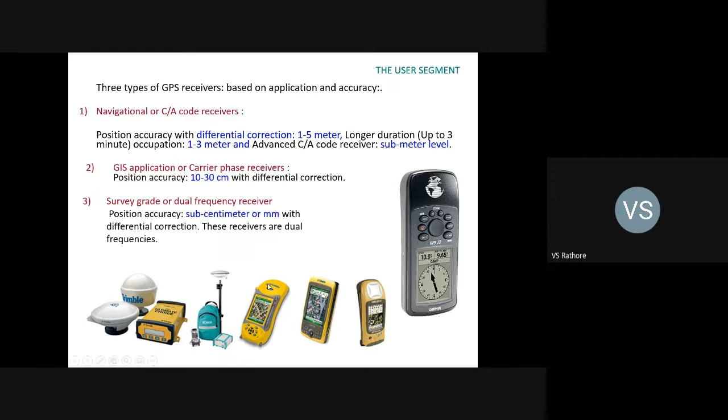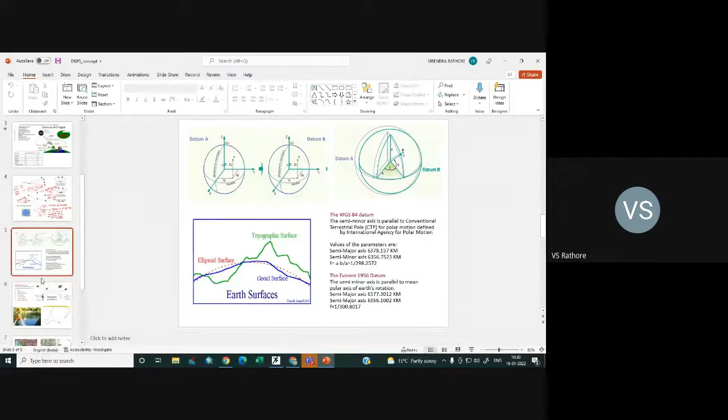Transformation of coordinates is to be done when you have one piece of information in WGS84 and another in Everest 1956, as found in topographic sheets. Now you want to analyze both together, so you have to either transform WGS84 coordinates into Everest 1956, or Everest 1956 into WGS84. Then you start analyzing, because all the information will be in one coordinate system and geometrically correct.

So in coordinate transformation, two methods are commonly used. What are these two methods? One is the Molodensky transformation.

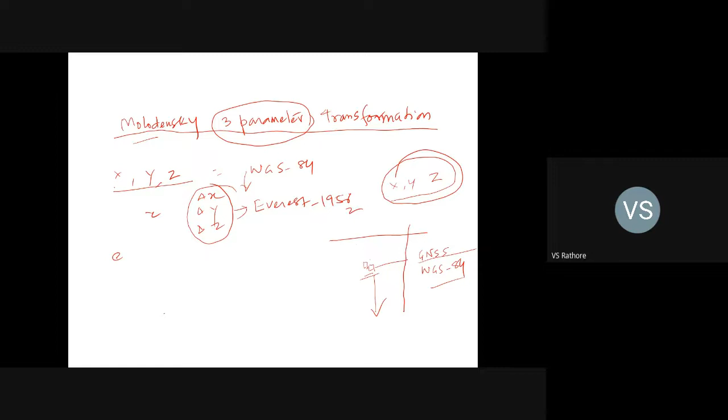X is obtained by Rn plus H, into cos phi into cos lambda. I will be explaining you this also. Then Y, these are Cartesian coordinates, x is Cartesian, y is Cartesian.

The formula is Rn, where Rn is radius of curvature, h is height above the ellipsoid, and we use cos phi and sine lambda. For X both are cos, for Y it is cos and sine lambda. Cos phi means latitude, phi is latitude, and lambda is longitude.

Longitude is the angle of longitude, and phi is latitude. So whatever angle you have, you put it in and find the cos, then calculate the Rn, and h may be given.

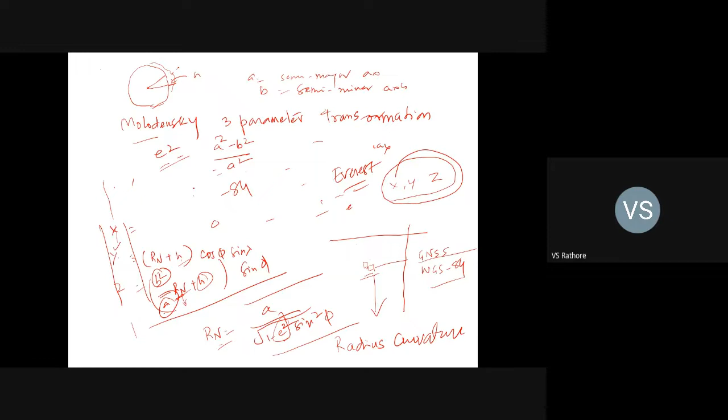You will get the x coordinate, y coordinate, and then del x, del y, del z. You have to obtain del y, del z, del x, del z - how do you get that? So in this 3-parameter transformation, you need to know the del x, del y, and del z.

So in getting those, you only have to identify some common points which are in the field - it may be a road crossing, a railway or road crossing, a railway line, or a river. So take the 4 points which are bounding your area. This is a common point, this is a common point, this is a common point, this is a common point.

So here you find out the value in WGS84 and also in Everest. So for any feature bounded by these 4 coordinates, you find out the displacement difference between WGS84 and Everest 1956, and it can be applied to all the points here. So coordinates of the feature which are in this bounded area can be transformed.

That is the procedure in coordinate transformation. Is it okay? Now what is the equation of 7-parameter transformation? I will be telling you that, then moving to another slide.

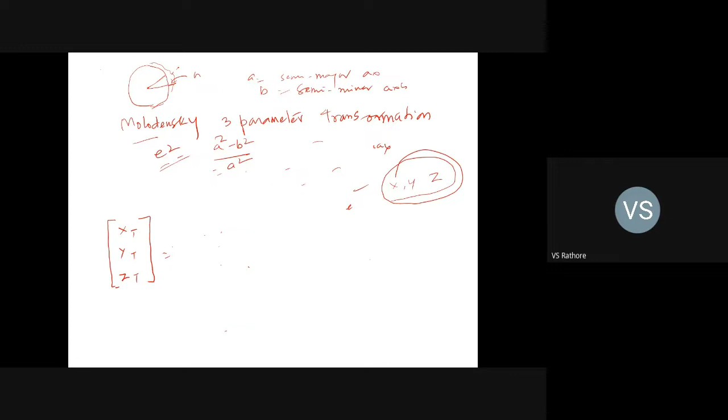7-parameter transformation: x, y, z target. We want to get x, y, z in Everest or in WGS84. So as I was telling you, in case of 7-parameter transformation, the Helmert 7-parameter transformation, 3 parameters of shifting, 3 parameters of rotation, and 1 parameter of scale are considered. Whereas in case of Molodensky, only 3 parameters of shift are taken into account. So that is the difference between the two transformations, Molodensky and Helmert.

In the Helmert transformation, the scale is multiplied first, or you can say scale is multiplied with the rotation parameters. Rotation parameters are: rotation along the z-axis, rotation along the y-axis, rotation along the x-axis.

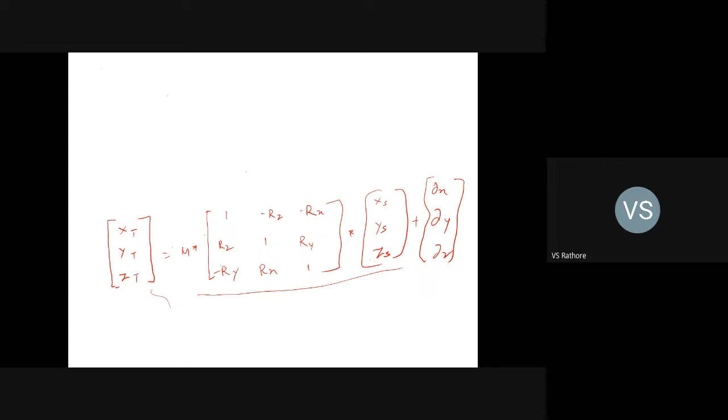Then I'll be coming to the differential GPS. See, differential GPS - D stands for differential correction, differential GPS, right? So in case of differential GPS, there are methods: static method, rapid static, reoccupation, stop and go, true kinematic, real-time static, and real-time kinematic. These are the differential surveying methods.

Now you understand the concept of differential corrections, right? Many people confuse what is differential - they don't understand, but I'll try to explain it in such a way that after this lecture, you will carry the concept very clearly, with the correct answer.

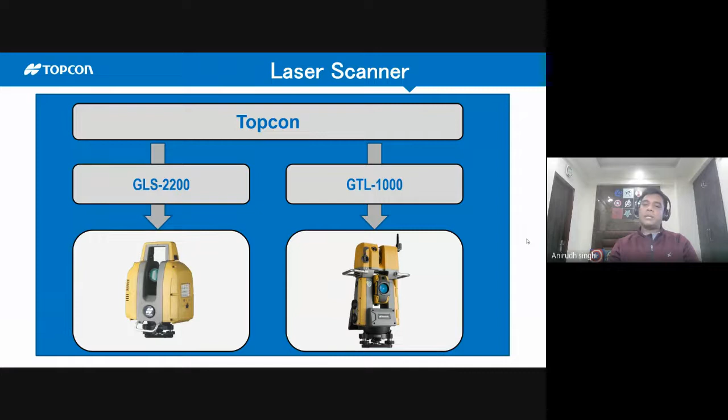As far as laser scanners are concerned, Topcon produces two products. One is GLS 2200, which is a terrestrial laser scanner. The second one is GTL 1000. I'll talk about this special instrument at a later stage because it's not just an instrument, it's a solution. On the lower side, you can see a robotic total station, and on the upper side, you can see a laser scanner - two instruments combined into a single instrument.

Now this is the GLS 2200 laser scanner. It's a terrestrial laser scanner which is tripod mounted, which has a full dome field of view.

This instrument consists of a 3.5 inch onboard touch screen. It has dual built-in 5 megapixel digital cameras, one wide angle camera, and if you want more detailed information of your feature, you have to go with a tele-angle camera. As far as data registration methods are concerned, you have backsight to prism method, and you can use the resection method also, so your data comes registered from the ground itself. It has automatic height measurements.

Now this is the GTL 1000, a snapshot of it. Earlier, for layout information you required a total station, and to capture as-built information in the field you were taking a laser scanner. So Topcon introduced a combination of both, where you can do a layout and capture as-built in the field.

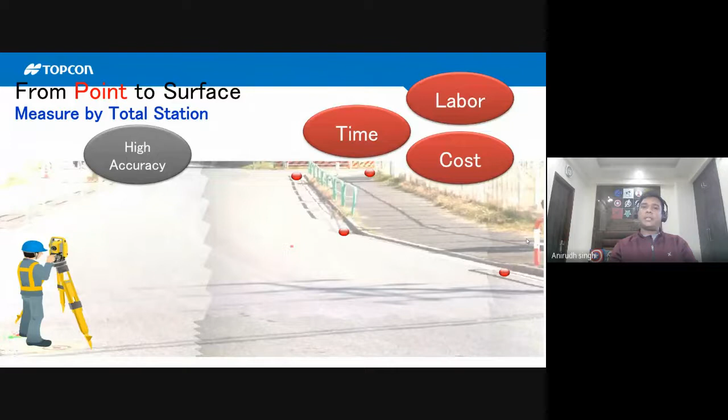So you'll get very high accurate data, but three things that will be hindering your automatic process would be: there would be a lot of time that would be taken, labor cost is involved, and there will be other cost of processing this data.

Now let's see volume measurement using total station. As I've already explained, you get accurate points from total station. You can do a proven method of occupation, backsight and resection in registering your data, but it's a very tedious process. The time taken will depend on the number of points captured, and fewer points leads to low accuracy.

Let's sample a project where we capture a surface from a total station or GNSS. This is a total station or GNSS surface, you take points like this. So what happens when you create a surface is the surface will not be exactly captured, and the density of the points is very sparse.

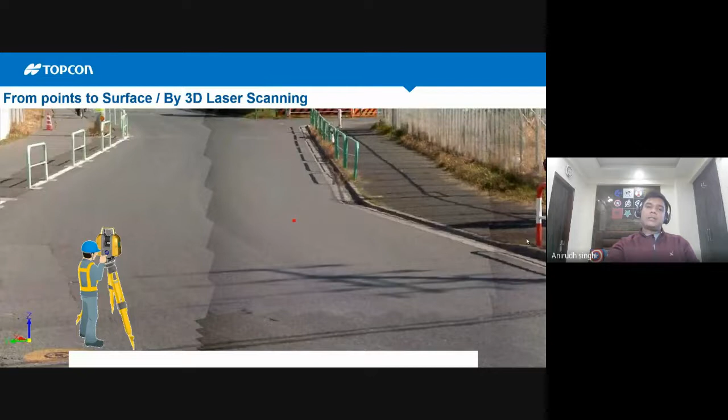Now we understand point capturing of a surface by 3D laser scanning. With a single button, what you get is millions of points in 360 degrees, and each point will contain your XYZ coordinates. It will be high efficiency, the density would be very high, and you will get more accurate data.

So what are the benefits of using a 3D laser scanner in volume measurements? You capture points using a terrestrial laser scanner, it's a very easy process. The same proven methods of registration, like occupation, backsight or resection, can be used. It's a one-touch button to capture point clouds, very easy operation. You capture dense point clouds within a minute, and your volume calculation will be very accurate.

Let's sample this by capturing a surface through the 3D laser scanner. So what will happen is, as the density of your points increases, you capture the exact surface out of it.

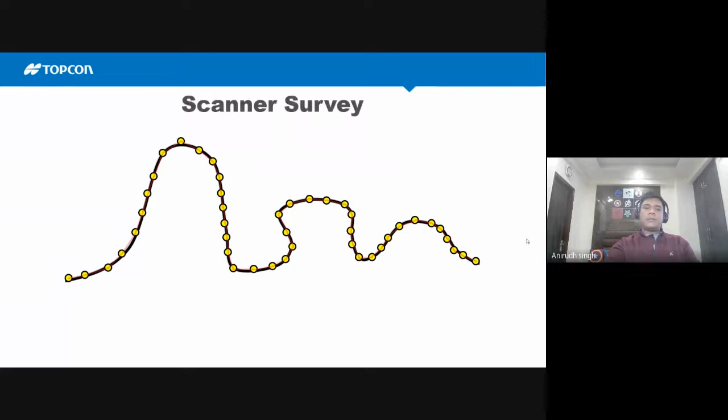Now, moving forward, while doing a survey through GNSS or your total station, you capture only points, so you do not capture the exact site information available. You need to revisit your site to capture other features present at the site. But with a laser scanner, all the information available on the site will be captured like this.

Let's sample how much time it takes to capture site information or as-built data. For volume calculation of a stockpile, what you see here is a stockpile scanned by GLS 2200. A total of 8 locations were scanned. It took only 5 to 10 minutes per scan per location, 8 minutes to generate the point cloud and do stitching, and 4 minutes to export Autodesk format point cloud data.

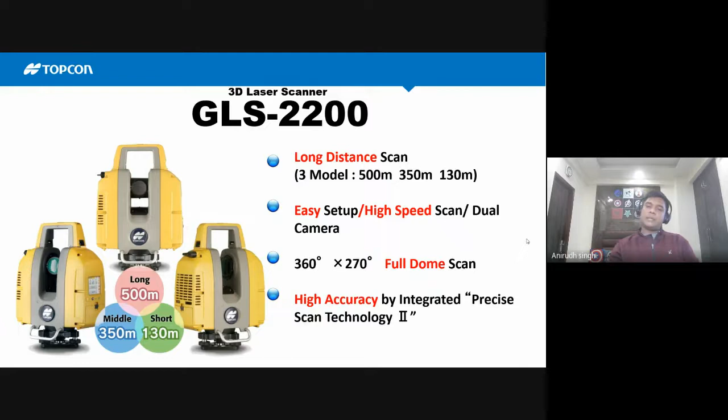Moving ahead, the GLS 2200 can do long distance scans, coming in 3 models of 500 meters, 350 meters, and 130 meters. It's easy to set up, high speed scan with a dual camera, with a 360 by 270 full dome scan. It has very high accuracy through integrated precise scan technology, which is patented and removes noise while you capture data from the ground.

Moving ahead, it has multiple applications, and the range depends on your application. You can do facility management, it can be utilized in BIM, you can scan large structures, do tunneling and tunnel monitoring, historical architecture, road construction maintenance, and of course volume calculation, which I was talking about.

This shows the modes in which your data will work, so it has different modes to capture data. If you want a detailed mode, it utilizes laser class 3R, then high speed, low power, standard, and close. The standard mode gives you the longest distance.

This is the scanning time. So for 25 mm at 10 meters, the measuring time would be about 0.4 minutes. You can control the density of point clouds, or spacing between two points, by choosing a scan interval while scanning the data.

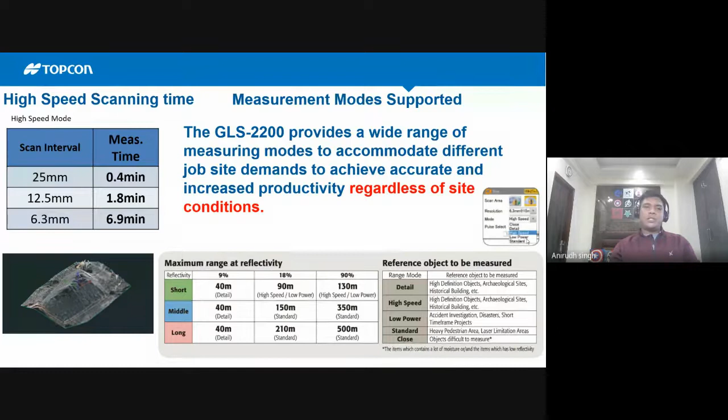Now, efficient measurement methods, meaning how you capture the data. You have the tie point method, where you stick target points, capturing data at occupation point 1, occupation point 2, and then later tie the two different point clouds from different stations together in software. It's highly accurate, but labor intensive.

The second method is shape matching. If there are identifiable features present, you can go back to your office and match these shapes. It's high speed and easy, but not as accurate. The best method to utilize in the field is occupation and backsight.

The next one is the resection method. In this, you utilize a prism - it can be a 360 prism, -30, -7, whatever prism you use in the field. It requires a bit of knowledge, but the data will be very accurate.

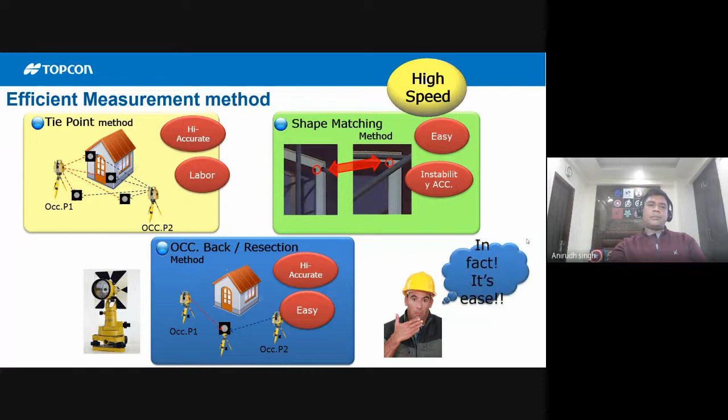Now, this is one video I would like you to go through, so you'll understand the product I'm talking about.

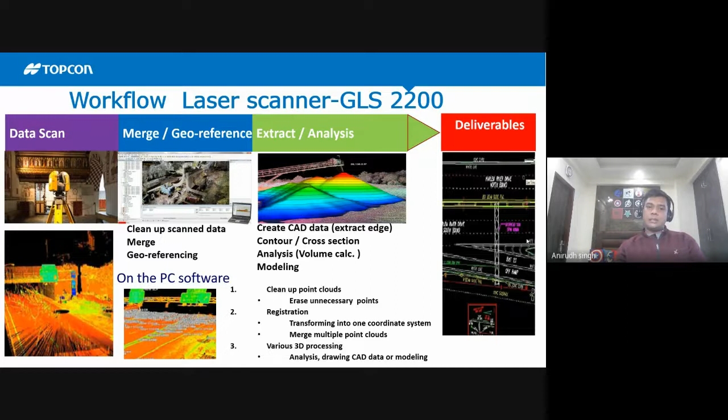Let's move ahead to the workflow process for this instrument. Initially, we scan our site, then take this data and merge or georeference it. If you've utilized occupation backsight or resection methods in the field, this step can be skipped. We clean our data, then extract and analyze it, and produce deliverables out of it.

The software that does the post-processing for Topcon products is Magnet Collage, which is an immersive point cloud software. It has a very easy ribbon layout with large buttons, is able to handle large files with ease, and you can simply export to third-party software for finalization.

So what are the functions of Magnet Collage? You can import your GLS 2200 data, do registrations, and visualize your data in intensity, RGB, and elevation modes. You can clean your data - most of the time there is noise present at your site, and data cleaning is part of the exercise with Magnet Collage. Then you can create DTM contours and do volume calculations, and export this data to various third-party formats.

So these are the standard industry specified formats. The common one is .E57. RCS is an Autodesk format. Then TXT, CLR, LAS is also a very common format used for LiDAR. Then PCD, PTS, CL3 formats.

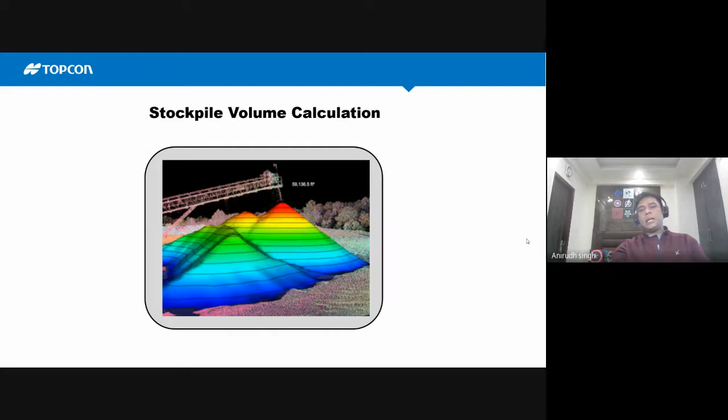Now, how this volume calculation workflow will happen in GLS 2200. Supposedly at mines, industrial plants, or any industrial application, you have to measure your stockpile. This will happen like for as-built information - you capture this data with GLS 2200, you take this data to Magnet Collage, and you can do a volume calculation in Magnet Collage also, but the most preferred way or industry uses Autodesk Civil 3D to calculate volume.

So you will be creating a TIN surface and you will perform accurate volume calculations out of it. So this is one example of how to get your volume calculation correctly in Autodesk Civil 3D. The first thing would be you have your point cloud data of a stockpile. What you do is define an AOI, or area of interest, for which you wanted to analyze a volume. You'll create a surface that will be kind of a TIN model.

So right now the AOI is being defined. You can see out of your scan site, you have taken out the stockpile on which the volume calculation would be performed. Now we will be defining a surface.

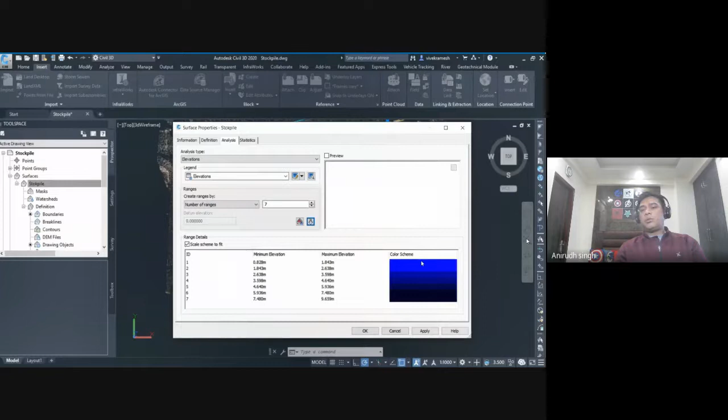And you will be providing the ranges on which you will be defining your stockpile. For color schema, you can choose different colors to highlight each layer. You can see minimum elevation and maximum elevation is defined, and you are providing a color scheme to identify different levels in this stockpile.

Now these are the surface properties, so we'll define elevation. You can see it is being identified in different colors.

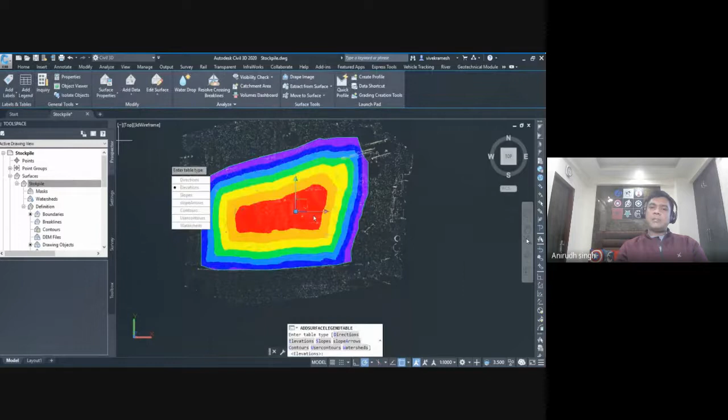The next thing you would be highlighting is reports. Generally the contractors do stockpile volume calculation in the mining industry. Supposedly it's a mineral mine, dolomite or lime, or in the coal sector - you can see a lot of this happening as an application. The contractors do it in Civil 3D like this to define different layers, and then they publish reports which need to be submitted with the agency to approve their BOQs, like bill of quantities. So this is how this activity is performed.

So now for each layer, there will be a different volume that will be defined. You can see right now minimum elevation, maximum elevation, area, and which color code we have given. So right now you can get a volume for specific layers.

So moving ahead, what happens when you utilize either a total station or GNSS? You have to manually measure your point. The data quality is not that great, and generally in summer's time you cannot climb the stockpile, especially coal, due to safety reasons - unfavorable site conditions. You lose a lot of money as the accuracy is always hampered due to less point collection in the field.

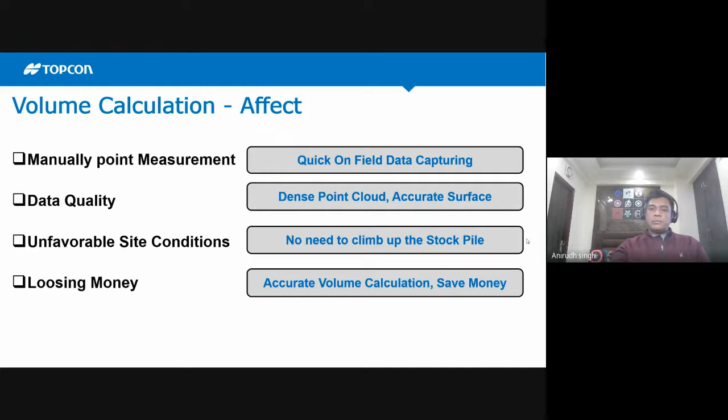So how is accuracy defined? You have a construction site where there is a lot of soil movement, or a mining area is there. So the objective is managing volume, planning of construction, or disposal of soil or any material that is present on the ground. So as in deliverables, what you will be giving - one would be volume calculations, so stockpile calculation can be done. You will draw 2D drawings, then 3D models, contour and cross sections can be drawn out of it.

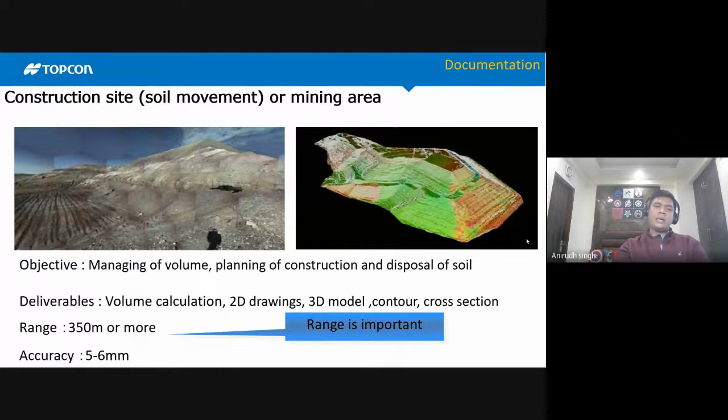So for this kind of application, you will utilize a laser scanner which will have more than 350 meters of range, and the accuracy that will come is like 5 to 6 mm with it.

Now we will talk about BIM, building information modeling. This is a very emerging industry, and a lot of construction companies are utilizing this technology.

So let's ask this question: is total station data enough for as-built? How to quickly finish the job? Do I need scanner data for as-built? Is it difficult to register scan data with control points?

Topcon identified this problem. Now they have a combination of total station and scanner for BIM applications. So comes this solution, called GTL 1000. This is a robotic total station combined with a laser scanner, and thus the GTL 1000 is produced.

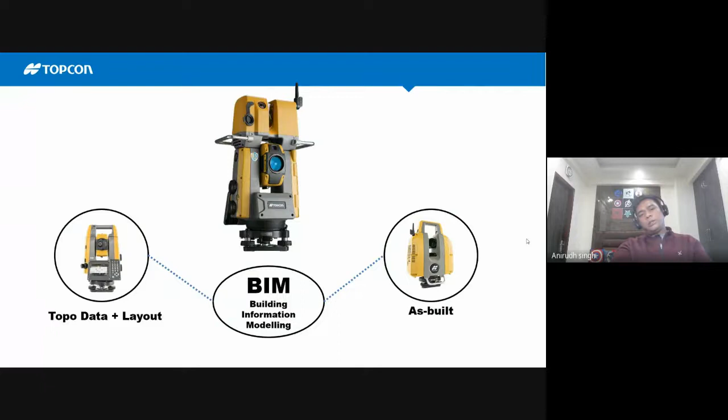What is this? With a lower body that is a robotic total station, you can do topo data plus layout, and for as-built information capture, you can utilize the scanner. Let's see this video to understand why this product is required.

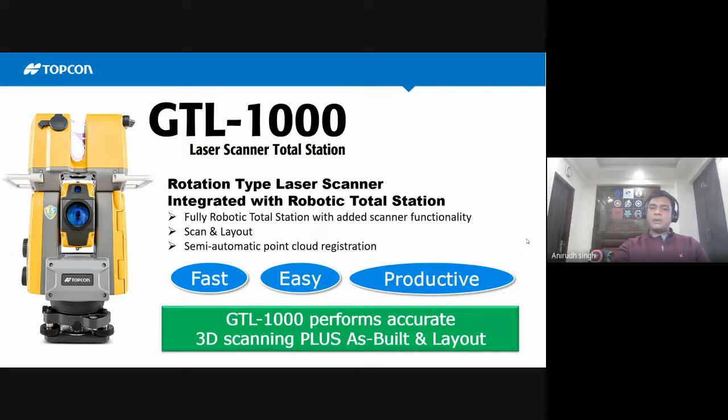As far as the lower body is concerned, it is a robotic total station, with auto collimation and auto tracking functionality. What is auto collimation? Right now, when you use a total station, you need to mark the center of the prism manually. Now with auto collimation, you roughly point your robotic total station toward your prism, and it will automatically mark the center of the prism.

Auto tracking functionality means if you are utilizing a prism, you can lock onto that prism with your robotic total station, so you don't need another manpower with your instrument. The instrument will rotate directly with the face of your prism. Then you can do offset measurements, and direct navigation with a laser pointer.

Moving ahead, the upper body, which is the scanner, can do a very accurate scan. The range of this product is 70 meters and the speed is 100 kilohertz, which is about 1 lakh points per second. The GLS 2200 has around 1 lakh 20,000 points per second.

Now the surface accuracy of this is like 5 mm at 10 meters. It has one camera, which is a wide angle 5 megapixel camera.

As far as scans are concerned, it has two modes. One is standard mode, giving a pixel point spacing of 22 mm at 10 meters, and it takes only 40 seconds to do a 360 degree scan. Then there is fine mode, which is about 11 mm at 10 meters, taking around 2 minutes 46 seconds for a complete 360 degree scan.

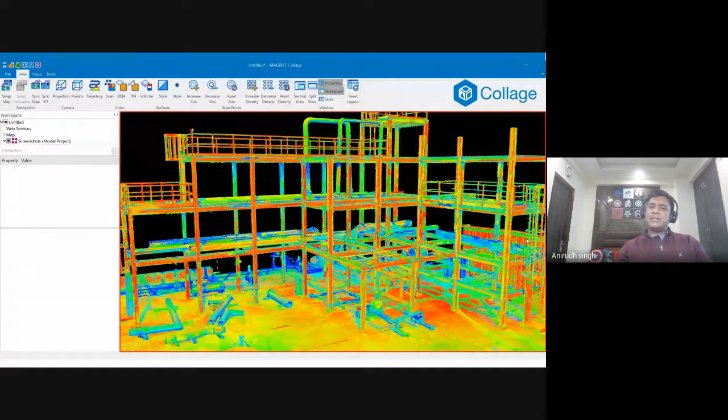This is one snapshot of a steel structure in intensity view that has been captured with the GTL 1000. Let's see how this instrument works.

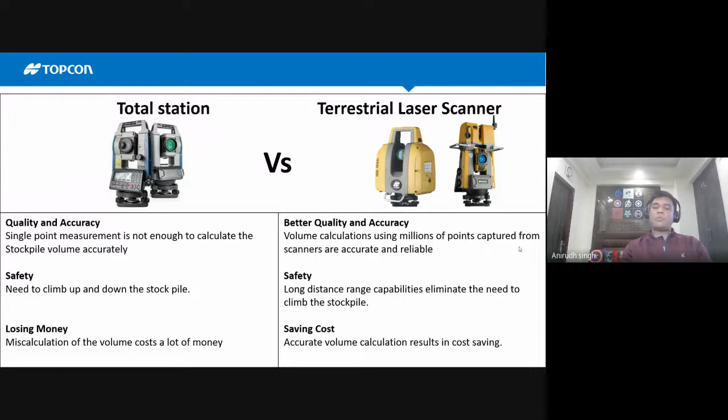Now, if you utilize a terrestrial laser scanner, you will have better quality and accuracy as you are capturing millions of points. You have safety because it's a long distance range capability, you don't need to climb the stockpile, and it will save you a lot of cost as you have accurate volume calculations out of it. So this is one application that I've spoken about, which is volume calculation.

Now I will move to the construction industry. Let's see what is happening in building information modeling that is being used in this construction industry. Let's start with the traditional one. Earlier, we were utilizing 2D drawings, which were CAD-based design drawings, so information was dispersed at that time. You needed to update drawings, which was taking a lot of time, and there was printing cost attached to it.

Now, this segment has moved to 3D models, which allows automatic drawing updates. You are utilizing software, and you do automatic quantities. Construction XYZ data is available, and you can visualize it before running construction on the field.

Now, there is a lot more happening, which is called BIM Collaboration Models. You can do project coordination and quality with it. You do analysis before putting up instruments on your construction sites. You can do simulations in 4D, 5D, now up to 11D, and you can have a digital as-built quality analysis through it.

So this infrastructure segment is changing. Apart from 3D, construction infrastructure companies are now moving to a different segment called 4D, 5D, and 6D. When you attach 4D to your project, that relates to time. When you attach 5D, that fifth dimension relates to cost. And 6D relates to maintenance of your project.

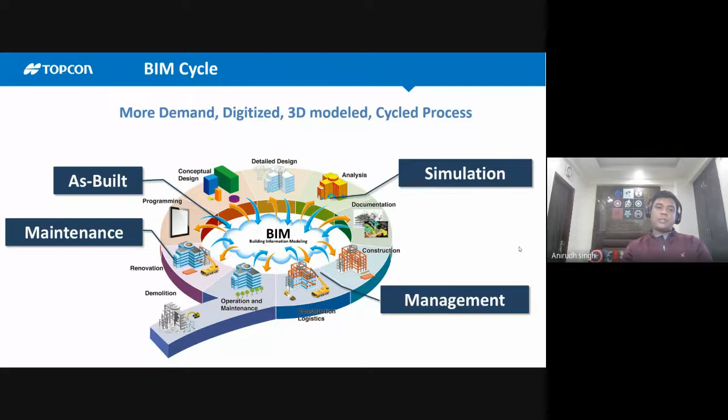For more demand, digitized and 3D model cycle projects give as-built information, and you do a lot of maintenance, simulation, and management. So you see this as-built information that is on the site. You simulate the data, meaning you see and visualize it, manage it, and later on maintain the site.

So this instrument will be utilized in different applications, with the same functionality as the GLS 2200.

Let's move to a segment which is a software called ClearEdge3D. This is a scan to BIM workflow solution. As far as hardware solutions are concerned, I have already explained our two products. Now let's move to software solutions, what we are giving to our clients in processing of 3D models. ClearEdge3D has three software programs: Edgewise, which is an automatic modeling software; Verity, which is a construction verification software; and Rhythm, which is a floor flatness analysis.

So for scan to BIM, you collect the data, convert it into an intelligent 3D model, which can be used for remodeling, facility management, construction coordination, and more.

So what is this new tech and what is the workflow? In the field, you utilize your hardware, either GLS 2200 or GTL 1000. You register your data into Magnet Collage, and then the modeling is performed in Edgewise, and final products are delivered into desired software like Revit, AutoCAD Plant 3D, AutoCAD, Aveva PDMS, CADWorx, and many more.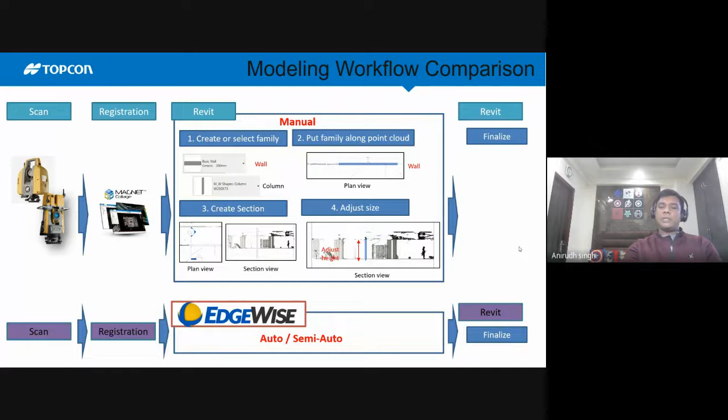And then this data was taken to Revit for finalization of your 3D models. Now what Edgewise gives you: you scan, register, take this data - this whole manual process is being done now by automatic or semi-automatic approach. Then you take this data to Revit and finalize the model. So this is a complete solution where you do a scan layout process, extract the data into ClearEdge3D EdgeWise software, then take this data to Autodesk Revit or Autodesk BIM 360 for finalization.

So what is Edgewise? It's a field to finish solution for automatic modeling. This is an as-built modeling platform. It utilizes advanced algorithms to automate tedious scan to BIM workflows. It models as-built pipes, structure elements, duct, walls, conduits, and cable trays from mobile and terrestrial point cloud data.

So this is Edgewise. It creates fast and accurate as-built BIM and CAD models. You can extract structure, pipe, conduit, ducts, walls, and cable trays present on your site. It's automated technology that reduces modeling man hours by 50 to 75%. In case of industrial plants, if you are extracting pipe, it reduces your modeling time by 95%. It is compatible with all major BIM and CAD softwares like Revit, AutoCAD, MicroStation, SolidWorks, and many more.

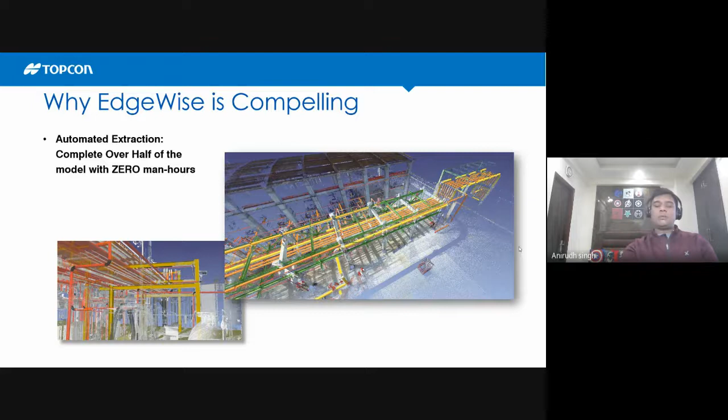So why is Edgewise compelling? It does a lot of automatic extraction, so it completes over half of the model with zero man hours. You don't need to model any data, just insert your point cloud data, and these models will automatically turn out in your software. It also has comprehensive QA tools to verify accuracy and fit of every object.

It has patented technologies like the Easy Connect tool. There is a situation, like in the upper snapshot, where when you scan a site there might be a hindrance - you are not able to collect the data and there are gaps in your data. So this software with the Easy Connect tool will connect these with straight connectors and elbow connections.

It has a rapid element extraction technology for structure and ducting, and Pattern Extract, which is a patented technology, so repeating elements will be captured automatically out of it. It has direct integration with Revit, Plant 3D, PDMS, and CAD, so data can go in and out from this software without any problem.

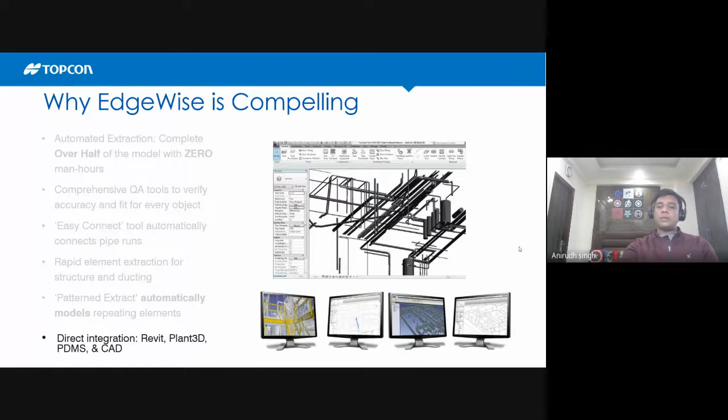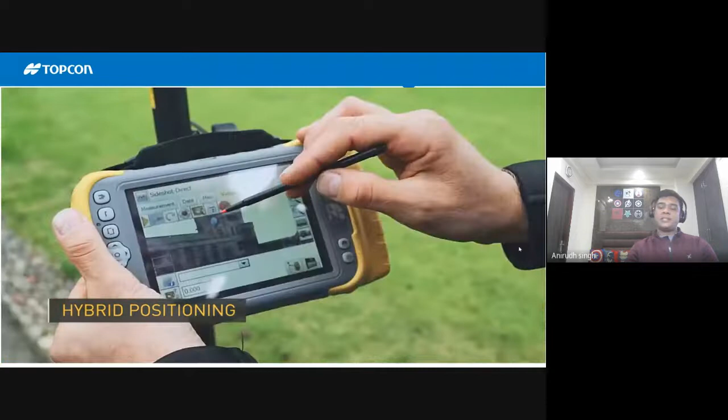So this is your laser scanning. This is GNSS survey. This is hybrid positioning - upper side you can see GNSS, lower side there is a 360 prism that has been utilized, and it is connected with the total station, robotic total station. So that is the auto tracking which I was speaking about.

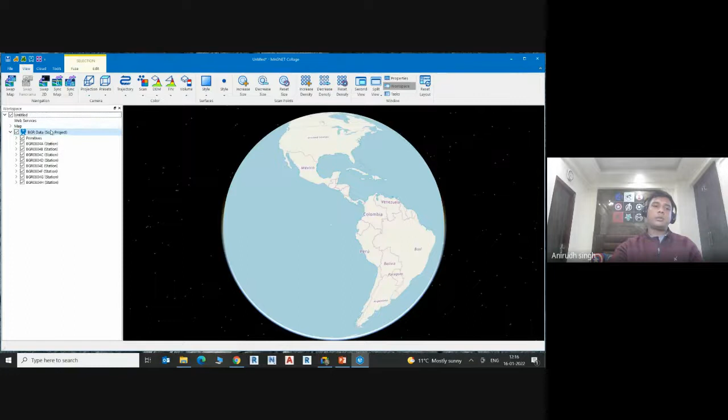What you need to do is you need to add your existing scan, or you can create a new project scan from this data. So right now my data has been scanned. To save time, what I have done is, let's see the data which I have done for a mine project for volume calculation applications, which I have talked about in the previous slides. So let's jump to this.

So right now what you see, the data is in 2D format. Generally when you work with total station or GNSS, you capture points like this, which is in 2D environment. So that doesn't give you an exact identification of your surface. So let's swap this map, and when you swap this map, the data turns into 3D.

So this is a coal mine, and what we're seeing is the data in an intensity view mode. These are the benches of coal. For your understanding, what I'll do, I'll change it into image view so you would be able to understand it more. So there are different visualization modes.

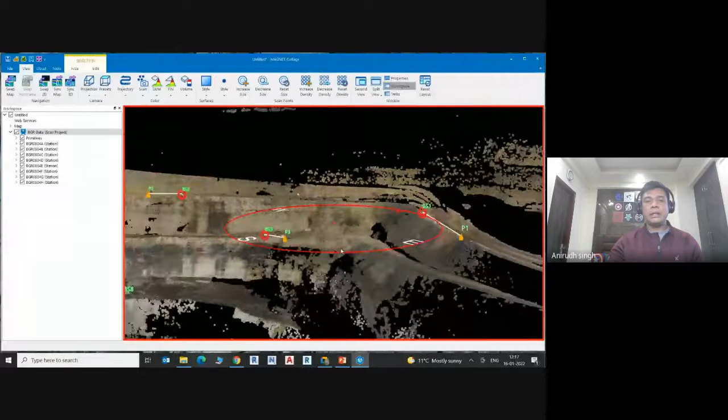Now I hope you would be able to see this data more clearly now. So these are benches, like this is one bench, and then they do excavation of this, dredging of this, and then they work on this bench. And in this way, this is an open cast mining for them.

So let's see if you can identify the elements that are present on the ground. We can utilize imageries also. So this is a blue orb. The imagery was captured with GLS 2200. Let's double click this. It changes the whole environment.

Now you will be able to see the data more clearly. This is a 360 panoramic view that I have already processed in this software. So let's swap our panorama. I'll go more deep to show you this data.

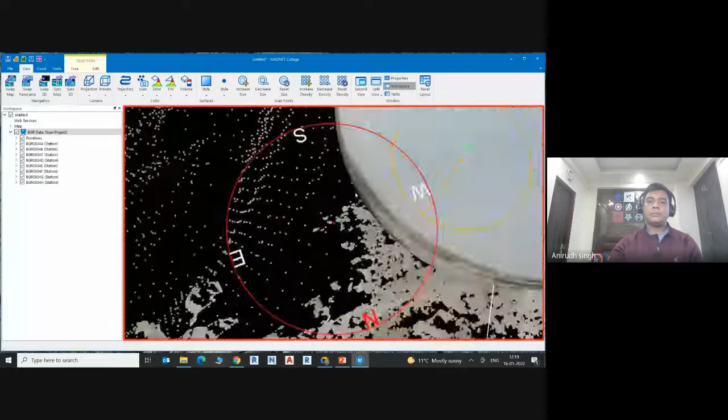Supposedly, let's go over here. These are the stations that are being captured. So this is one more closer view of a bench. And what you see, this black portion, this is coal that these companies are mining from this side.

So you see a black portion in your point cloud data. This is because of the water that is present on the ground. The data consists of around 2 kilometers of these benches. These are heavy machineries that are working. Let's swap the panorama.

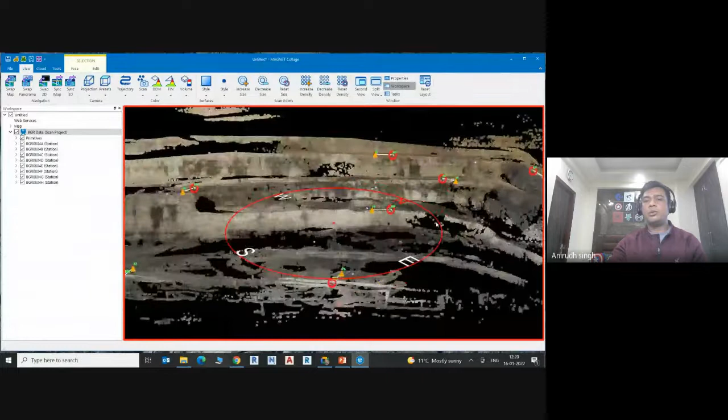So just for your understanding how this capturing has been done, what is point cloud data? So for this application, companies majorly use volume and stockpiling volume calculations that have been performed through this. So it's not possible for you to do this with a GNSS survey or total station survey to capture these benches in detail. So when they excavate this site, the whole material falls down, they create a stockpile, and then they would be able to generate billing of quantities on which their billing is done.

So let's change into intensity view for this. So just to give you an idea how this data looks like and what are the different functions or features that you can do with it, I've shown you this mine. So you would be able to understand what point cloud is. Now moving ahead, I'll take out this, I'll show you one more data.

So this is taken from GTL 1000. It is an overbridge to create 3D models.

So as you can see, this is the Gurgaon area. It is a lot of data. So the instrument captures around 1 lakh points per second. Each point will have XYZ coordinates available with it, which is not possible with basic surveying instruments like total station or GNSS. So I'll change this into intensity view mode.

To image mode. So let's see to it. The purpose of today's session is to show you, apart from surveying from GNSS and total station, the technology is advancing and you will be surely seeing this instrument on a regular basis at your sites.

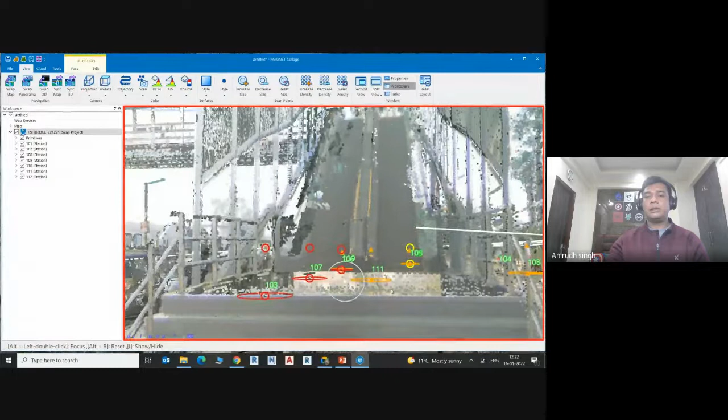This is one, which is an elevator. Let's move out of this. So if I'll take out only one station, these are different stations. And from scans, what you can do, you can check out your LiDAR.

Then you see, this is ABW Towers, where Topcon is headquartered in India. So this is just outside of this office. And if you wanted to own your point cloud data, just simply click on this LiDAR images.

So just to show you in images, these images were captured 360 degrees, and later on the panoramic view was created while processing this data. So if you wanted to process this data, there is a process scans and images options. You can go over there.

So colorize scan from images, that means this point cloud data is mostly panchromatic or black and white. The color comes from the imagery itself. The software does it automatically from here.

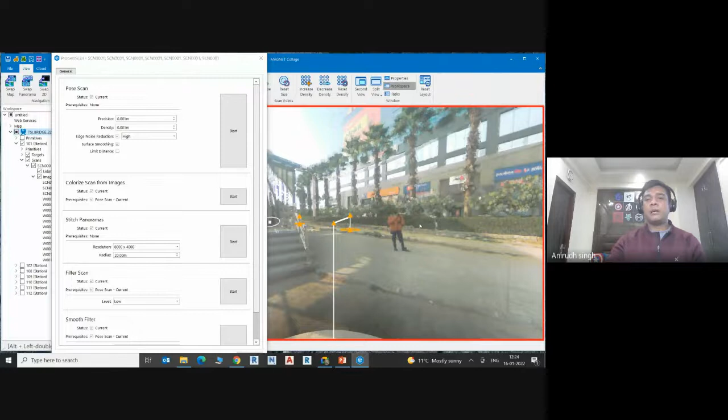You can stitch your panoramas. When I'm moving like this, a 360 degree imagery is created. So it's a panorama, that is, these images are automatically stitched.

So let's move to intensity one. So this is the features that will be captured.

Now let's move to our third application, which I have shown for building information modeling. Discard this. Now one product which is called Edgewise. This is an automatic modeling software. It creates 3D automatic models from your point cloud data.

So this is the interface of your Edgewise. So one option which is called process scans, that means you need to pull your data into Edgewise from this window. So there are three options that are available. One is called structured workflow. The other one is unstructured workflow, point database workflow.

So structured workflow, actually, when you have scanner locations available in your data, so that is like structured data. And when you do not have scanner locations or XYZ information of your instrument, then this data becomes unstructured.

So what you are seeing, the file types, these are the common file types, or majorly all the file types that are being utilized to capture your data or 3D models. So this .dp, .e57 is an internationally recognized format. The data can be structured and unstructured into this format.

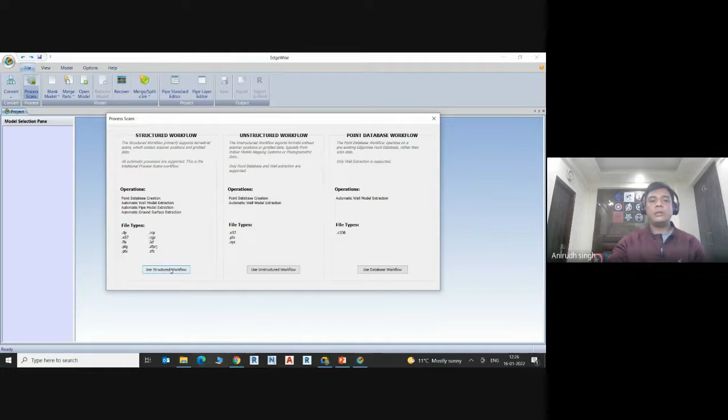So when you use a structured workflow, supposedly you see this data, I'm calling one data which is like industrial plant data. I'll show you how the industrial plant data will look like. So you see automatically you can create building, piping, ground from this.

So you create a point database out of it. If you check out, it will automatically extract walls. The piping would be automatically extracted, and you can generate a surface out of this. So to save on time, I have done it previously. So I'll just open the model, how the data will look like.

So this is a database file we have generated, and then this is for piping modeling. So I'll open this data.

So what you're seeing right now, these are the pipes for an industrial plant that is automatically being generated without any manual intervention in the software from your point cloud data. Now, this is your point cloud that was captured through GTL 1000.

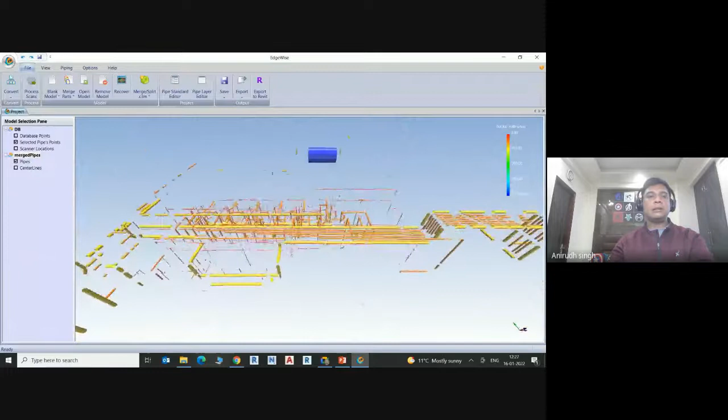So how modeling can be done through this? I'll show you in a very brief moment. So let's take out this point cloud right now by pressing the Z button. And then we need to go into this piping model segment.

The first thing we need to understand is a smart sheet, which is a QC sheet, a very intelligent spreadsheet. When you go over here, you see for each segment, when you click on something, you see it has been highlighted with a point cloud. So the length has been defined. You have a bend radius, diameter, but nothing like nominal pipe size, subtype, type. These are not defined because generally this will be defined after you apply your standards to it.

Let's move to it. See, there are gaps in this data, how to fill this. You'll use your Easy Connect tool and just run it. Now you can see your pipes are connected with the straight connectors and elbow connections.

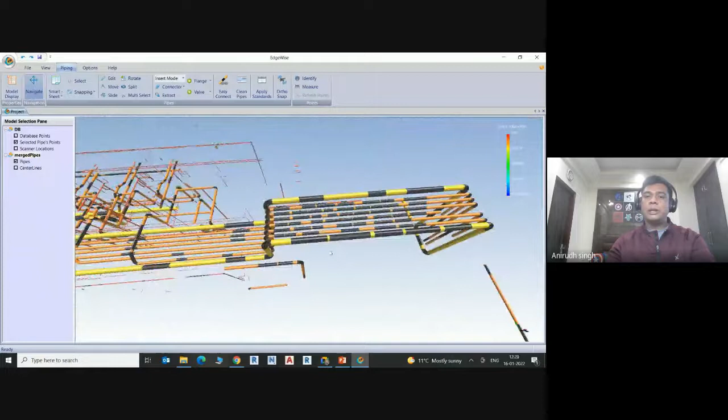And if you own your point cloud data, you will be able to visualize this. Now the next thing would be, since these are connections, we need to make it as a true pipe. You have to run the Clean Pipes tool. So when you run this, all your data becomes a true pipe.

So now these pipes have turned into true pipes. The next thing, you will apply some standards to it. So standards are basically defined on which your project is working, but these are customizable also up to your project.

So the common one is ASME, and then it has DIN-BS, ISO, JIS, Korean. You can utilize any of it. Right now, I will be utilizing the ASME standards with a pressure rating of supposedly 150 PSI, and OK.

Now I'll just go back to my smart sheet and check what changes it has made. So you can see now it is a more accurate and standardized way. We have a bend radius, then a diameter with a nominal pipe size of inches. Then you have a pressure rating that has been applied to all your pipes, or you can apply it to individual pipes as required. The standards of ASME have been applied.

And we have defined it as a Revit family. So supposedly you wanted to change this information for these 4 pipes, there's a multi-select option over here. You can put up a layer. Layer is like gas layer, and you see your layer is defined as gas.

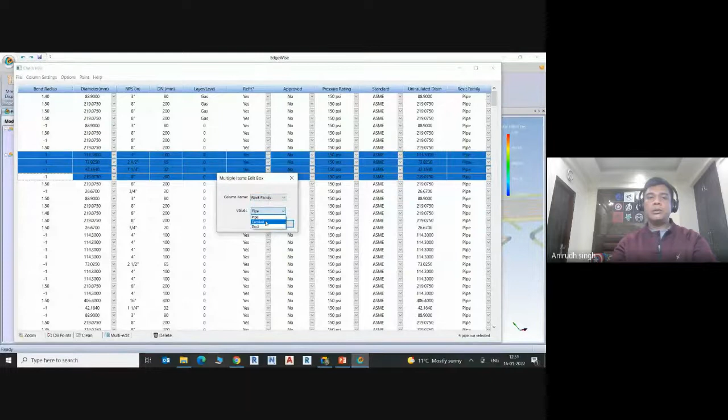And then supposedly for these pipes, you wanted to change the Revit families. Later on, we'll be utilizing Autodesk Revit. So you can go directly to a multi-edit tool. From here, a Revit family, you can define it as conduits also. So you see these pipes have been changed to conduits.

And in this way, you will be able to do around 95 to 96% of your modeling that was earlier done manually. The best way to view this is like over here.

I wanted to show you one more very good feature of it. Scanner locations, the data which we captured. So these are different scanner locations. You will be able to see some green orbs.

When you double click this, the software has a very good feature. So this is not an imagery, this is point cloud data only. This point cloud data is being changed into a photorealistic view, so you will be able to identify the elements that are present in your data.

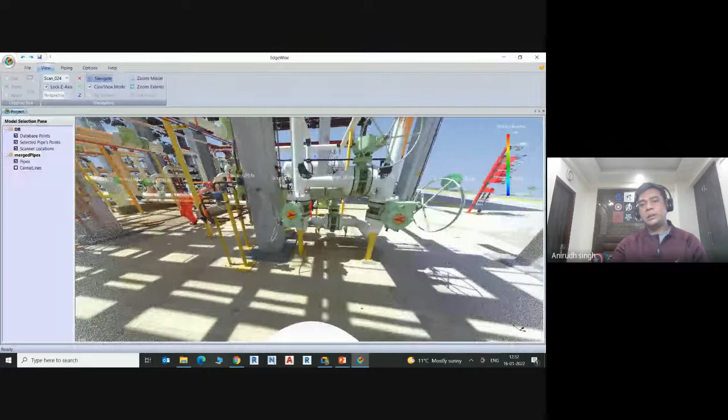And later on, this will be modeled like this. If you wanted to move forward to another location, just double click on the next scanner. So this is a more photorealistic view of this.

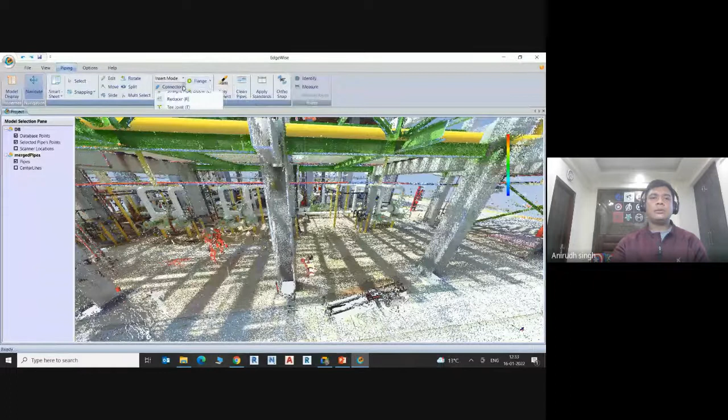Now, there are other things that you can add into the data. Let's change it to our database view. These are the elements that need to be attached with this, like if you wanted to attach valves and flanges. There are options given over here, and then you can use a straight pipe, reducer, T-joints in this data.

So supposedly you want to put up a flange. I'll take out my point cloud data so you can see it clearly. So let's use a weld neck over here. You can see I've added a weld neck flange over here.

And then if I wanted to add a gate valve, I can be able to do that. And there are rotating functions, so you can generally fix the rotation, and then you can slide it to the exact position where you wanted to place this.

The last thing I'd like to show you is go into file, and then you can export directly this data to Revit, or there is an option called export. So in pipes, you can use multiple formats or whichever third-party software you are utilizing, like AutoCAD, MicroStation, PDMS, PCF, Plant 3D formats, and this data will be transferred along with your point cloud data.

And later on, you can build on this to create 3D models for this. Why is this required? So supposedly you are working in an industrial plant.

They have a very limited period of time of maintenance. Supposedly they target only 20 days in a year to change aging features like pipes or something. You can create these, and later on that 20 days will be cut down to 7 days of maintenance. So it gives you more productivity.

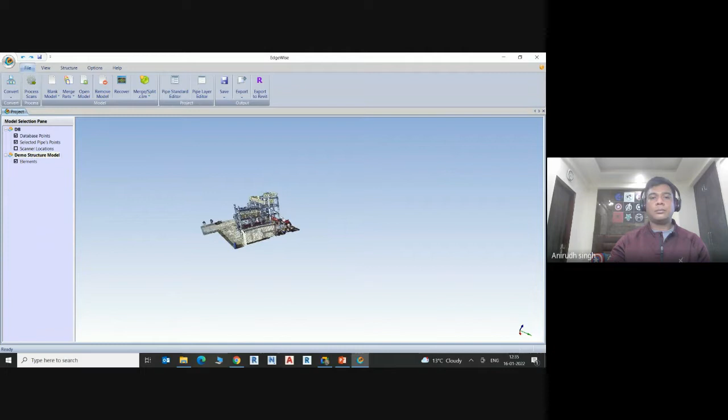So this is how a steel structure would look like when you scan with a laser scanner or any laser scanning machine. So this is a steel structure. You can see your beams and columns.

Now to start with, what you can do, there are different options - you will go into the structure tool, and you will select your standards. There are different standards for different elements. For steel, AISC is a common one. Then you can use European, Imperial, JIS, Korean, or metric. Right now, supposedly I'm using AISC steel.

Different elements can be mapped with I-beam, round tubing, truss tube, angle iron. So you need to choose that to match. There are two options: auto fit, let Edgewise decide what is the best fit for your beam and columns, or specified dimensions available, and it will be mapped on that basis. Right now I am giving Edgewise freedom to decide what is the dimension for this.

Next, there is a spreadsheet built into this. What you can see right now, you click on this, you see the same beam and column into this. Now, what you see in green is your point cloud data, on which the automatic modeling is being done. So I'm okay with this, let's see if I can build on something.

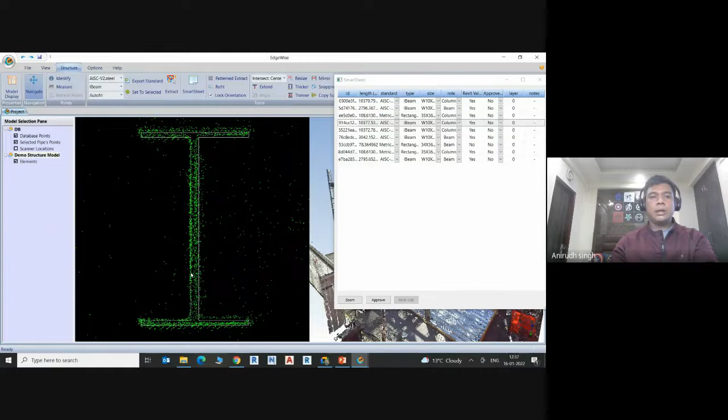If I wanted to change this, there is a resize option that has been given. You can resize it as per your satisfaction, and you can move it to make it more accurate. So like this, we will be building our spreadsheet in a 2D mode also.

The next thing would be to see - I've already created or extracted these beams and columns. What I'm going to show you is an automatic process. So this is our beams. I'll be using a patented technology, which is called patterned extract. So you see, automatically this side, if you see the point cloud data, this side is automatically created.

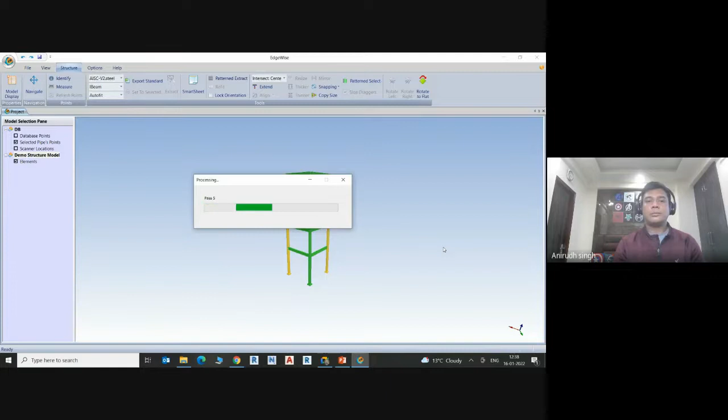If I'll move to next, and then push my shift button, I'll select my beams and columns. I'll use this patterned extract, and then lock my orientation. You see, within a few clicks, my whole steel structure I would be able to model. So if I turn on my point cloud data, you see this portion is completed now.

Later on, we will do some QC on that. Now I'll select this side portion. I'll use the same patterned extract technology, take out my lock orientation. It will work on the same dimension that is available because these are repeated patterns.

So it will identify. Now this works totally different from the algorithm that we just used to extract pipes. In this object recognition, an object-based recognition algorithm is being utilized to identify these elements in structures. That same goes with your ducting and walls. So let's see this.

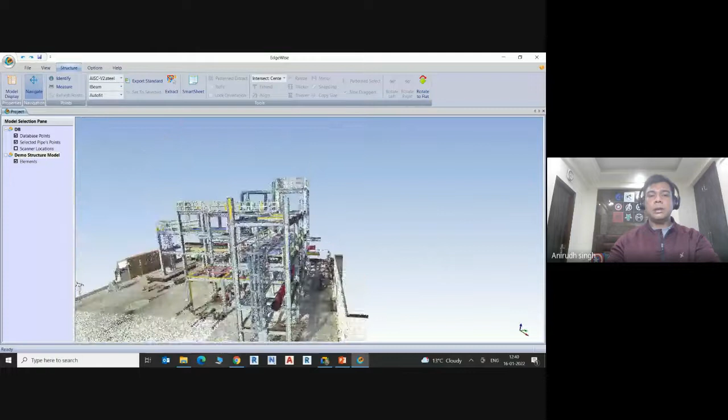Now you can see if I turn on my point cloud data, this is in mapped now, automatically within a few clicks. Later on, if something is missing, I can see. If supposedly your software is not able to identify something, I'll delete it on purpose, so you can utilize a semi-automatic approach also.

You turn on your point cloud data, use the autofit function, use the extract function, and then you can semi-automatically extract this whole thing. So you see, this has been extracted. Now this is being short, so you can use your extend button, so this column would be attached to your beam.

So I'll use my extend button over here. Now this has been done. So this is for your structures.

In this way, there are other models that you can build, like cable tray. The ducting can be done, and you can use wall functions with it the same way. I'll show you the walls one.

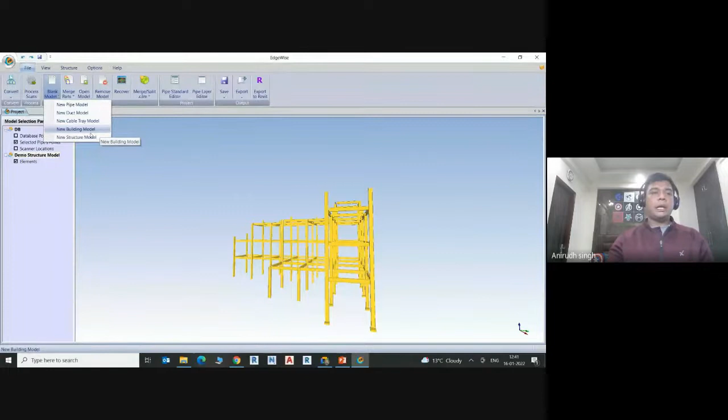How the building is being constructed. So I've already processed the data and extracted the walls. This is a point cloud data for your building, which is under construction, or if you wanted to do a renovation. So I'll take my point cloud data.

You can see these are the walls which is automatically being created through this point cloud. Now these levels is generally generated because of different floors. You wanted to model it. If you wanted to give your own levels to it, it's a possibility.

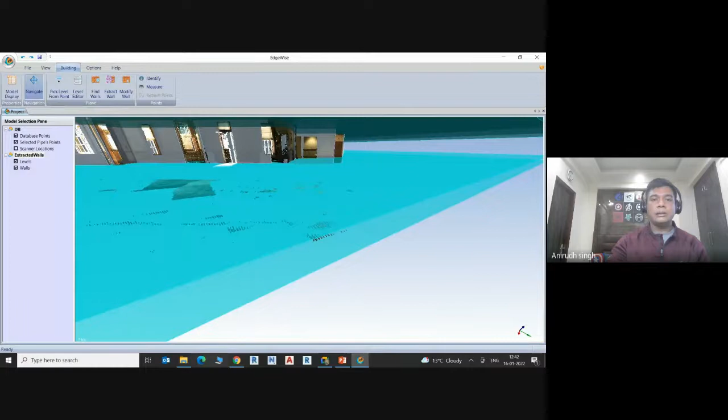So supposedly if I would like to add one level on this window sill, I'll go into pick level from points, close this, and pick it. One more layer would be added, and from level editors, different elevations can be added to your project. This is editable, you can edit it as per your project requirement. I'll take out my levels.

Then if you wanted to do some modifications into your walls, that also you can do. So you can modify your walls. What you see, these arrows, you can increase the width if you wanted to, like this.

With extract wall, you can extract any wall that is not been automatically extracted. You can even find walls from here. So the same thing, you will go into files. You can export this building to different formats and later on build your 3D models out of it. And then there is a direct export to Revit.

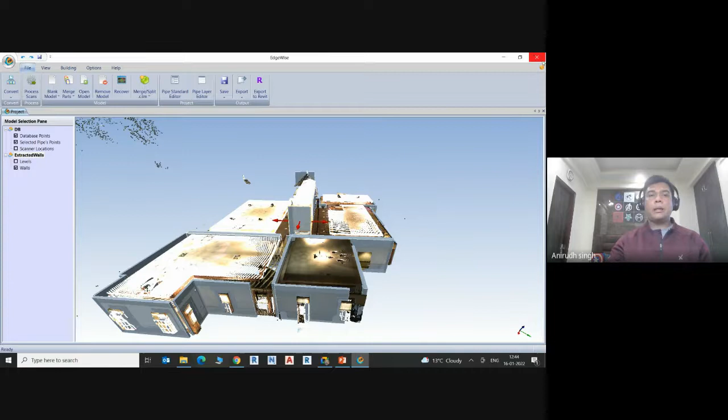So this concludes my demonstration of Edgewise. The last thing which I'll show you is the integration into Revit, how this is being done. So I'll play a video for you. Let's see how this has been integrated into Revit. The same process can be applied to.